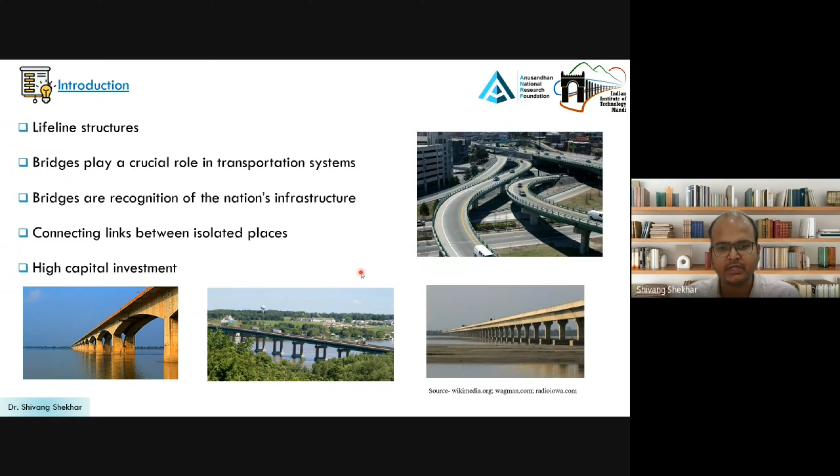Bridges are one of the most critical lifeline structures, serving as vital links in transportation networks. They connect communities, support economic activities, and require significant capital investment. Therefore, ensuring their safety and functionality is essential for uninterrupted transportation and societal resilience.

Throughout their service life, bridges are continuously exposed to environmental stressors such as corrosion, flooding, and scour, which progressively deteriorate critical components and reduce structural capacity. Moreover, many existing bridges were designed using antiquated design standards, making them more vulnerable to natural hazards, including earthquakes. Therefore, assessing their lifetime vulnerability is essential for ensuring long-term safety and resilience.

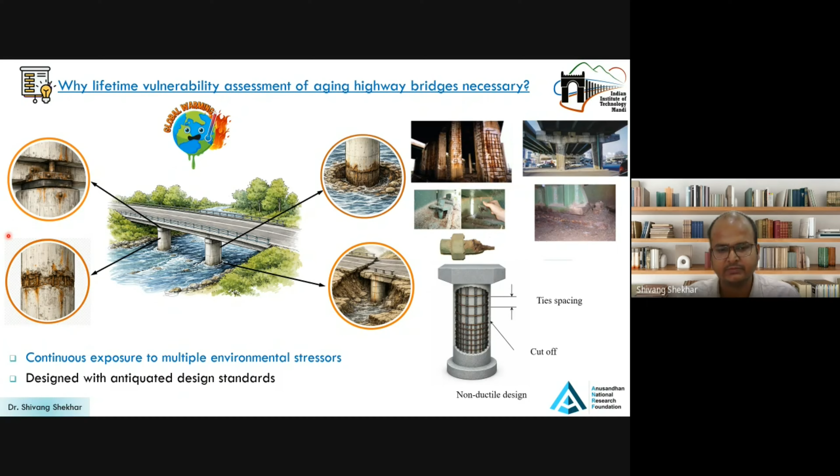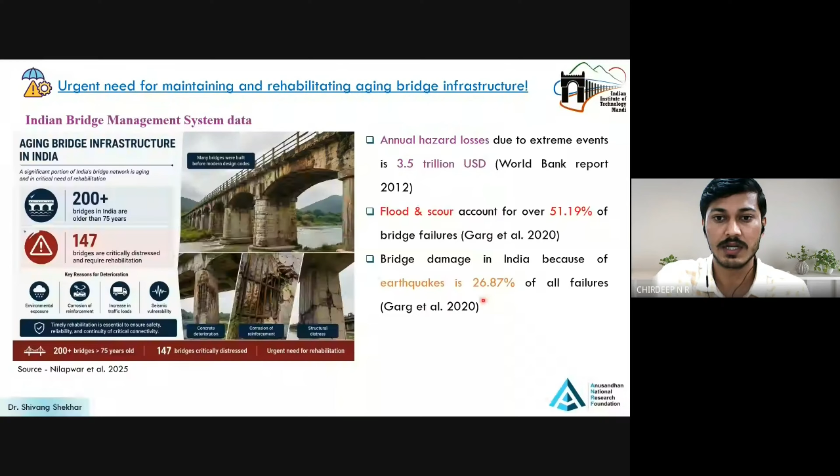The need for timely maintenance and rehabilitation is particularly critical in India. According to IBMS, more than 200 bridges are over 75 years old and 147 are already in critical distress condition. Furthermore, flood and scour account for over half of all bridge failures, while earthquakes contribute nearly 27%. These statistics clearly highlight the need for lifetime vulnerability assessment and effective rehabilitation strategies for aging bridge infrastructure.

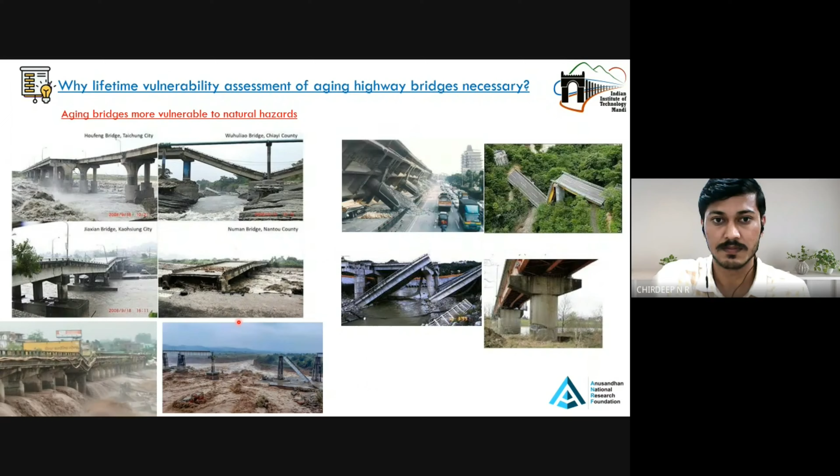In addition to aging and natural hazards, climate change introduces an additional long-term threat to bridge infrastructure. Rising global temperatures accelerate corrosion of RC components, while changes in rainfall patterns increase the frequency and severity of floods and storms. As a result, bridges are expected to deteriorate faster and become increasingly vulnerable throughout their service life.

To capture these future changes, climate projections are represented using the latest CMIP6 shared socioeconomic pathways, or SSP scenarios. These scenarios describe different greenhouse gas emission pathways and their corresponding temperature projections. In this study, these climate projections are incorporated to evaluate how future climate conditions influence bridge deterioration and lifetime vulnerability.

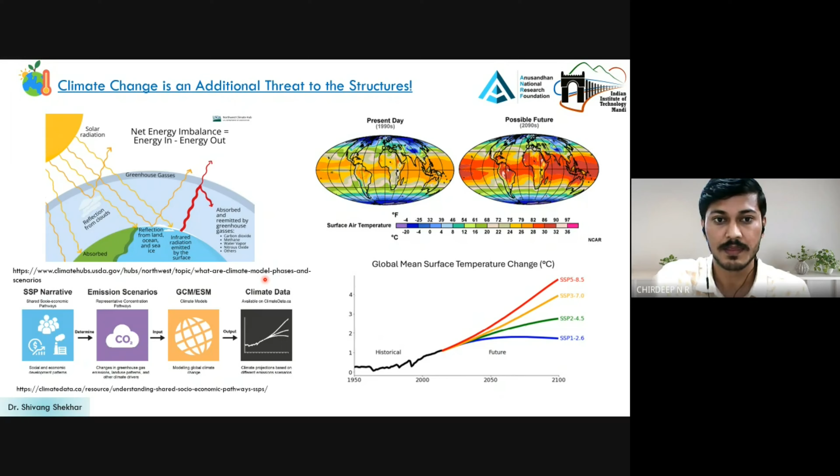Climate change accelerates chloride-induced corrosion in RC bridges by increasing temperature and environmental exposure. Corrosion causes rust formation, cracking, concrete spalling, and loss of reinforcement, which leads to reduction in strength and ductility. Consequently, when an earthquake occurs, these deteriorated bridges become much more susceptible to severe damage or even collapse.

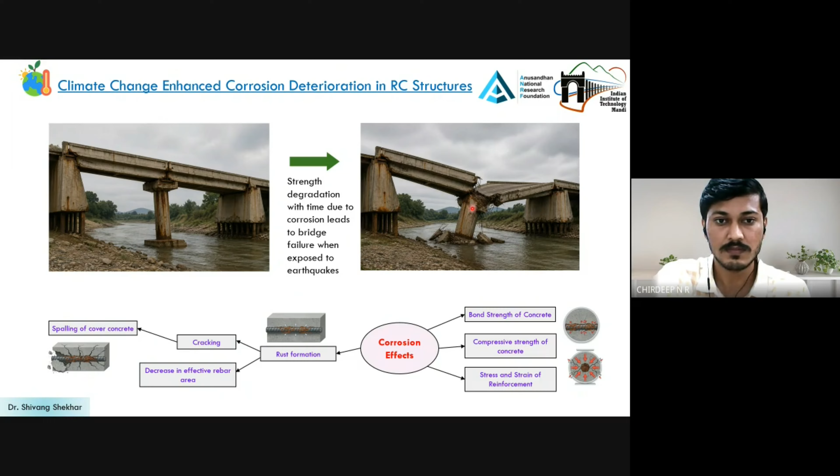To quantify the effect of climate change, temperature and relative humidity correction factors are incorporated into the corrosion initiation model. The results show that average corrosion initiation time reduces from 31 years under normal conditions to around 22 years after considering climate change effects, which indicates significantly accelerated deterioration.

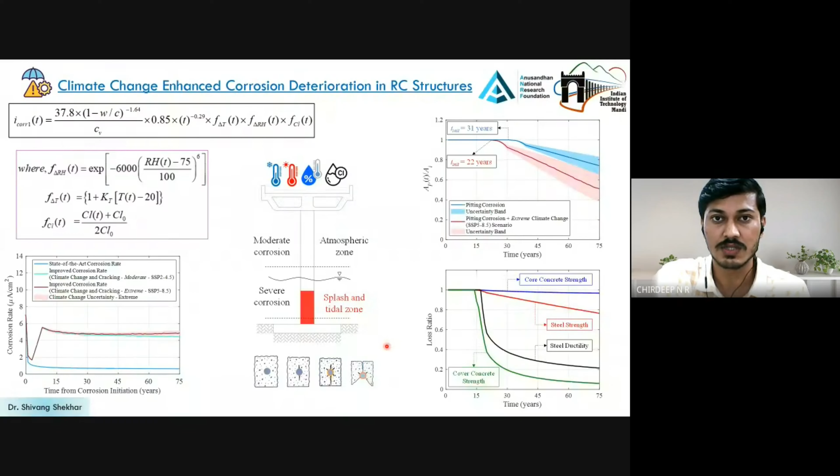After corrosion initiation, the corrosion rate increases progressively under climate change, leading to greater reinforcement area loss and continuous degradation of both steel and concrete properties. Consequently, the bridge experiences a substantial reduction in its load carrying capacity and seismic performance.

Climate change not only accelerates corrosion but alters the hydrological cycle by increasing extreme precipitation and flood intensity. These higher river discharges result in deeper foundation scour, reducing foundation stability and causing larger deformations. Consequently, riverine bridges become significantly more vulnerable to structural damage and failure during extreme events.

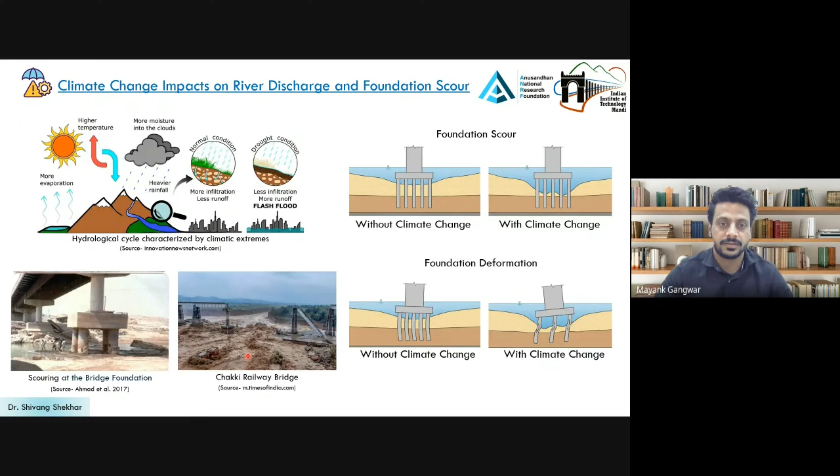Scour can be evaluated using two approaches: as a time-dependent process over the bridge service life, or under an extreme flood event. In this study, the time-dependent scour depth was estimated using historical discharge data, while the effect of climate change was incorporated through future discharge projections for the 100-year design flood. As shown in the figure, increasing river discharge under future climate scenarios results in significantly greater scour depths, making bridge foundations more vulnerable.

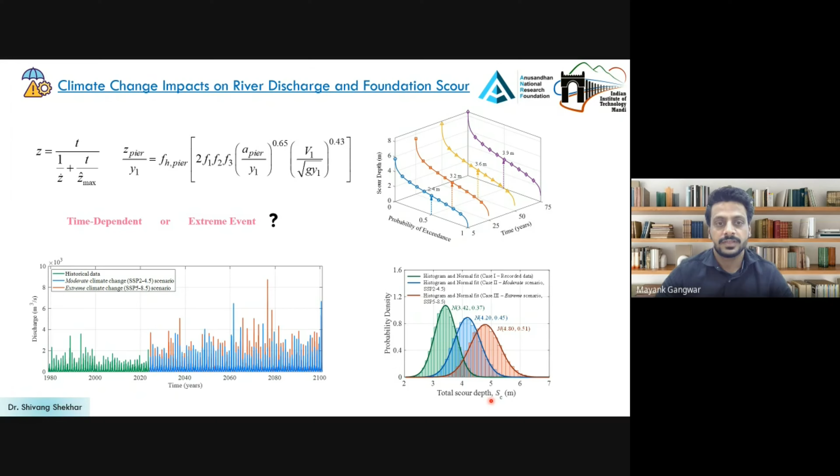Till now, we have seen how climate change accelerates corrosion deterioration and leads to deeper foundation scour. To evaluate the combined impact of these climate change-induced hazards on bridge performance, we have developed a high-fidelity finite element model of a typical highway bridge in OpenSees. The model incorporates detailed nonlinear behavior of bridge components, including bearings, abutment, foundation, and the effect of corrosion and scour.

Finally, the developed numerical model was validated against experimental studies, providing confidence in simulated structural responses.

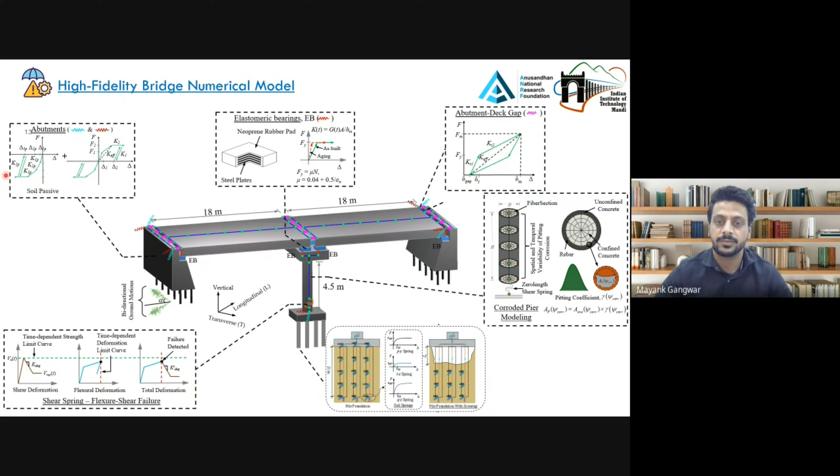After developing the numerical model, we investigated the effect of climate change accelerated corrosion on the service load reliability of an RC bridge in Gujarat, India. The result shows that corrosion alone reduces the bridge shear capacity by about 33% over its service life, whereas incorporating climate change increases the reduction to nearly 57%, indicating much faster deterioration.

A similar trend is observed in service load reliability. The bridge reaches an unfit for use condition after about 83 years under corrosion alone. But climate change further reduces the service life by approximately 18 years, highlighting its significant impact on bridge durability.

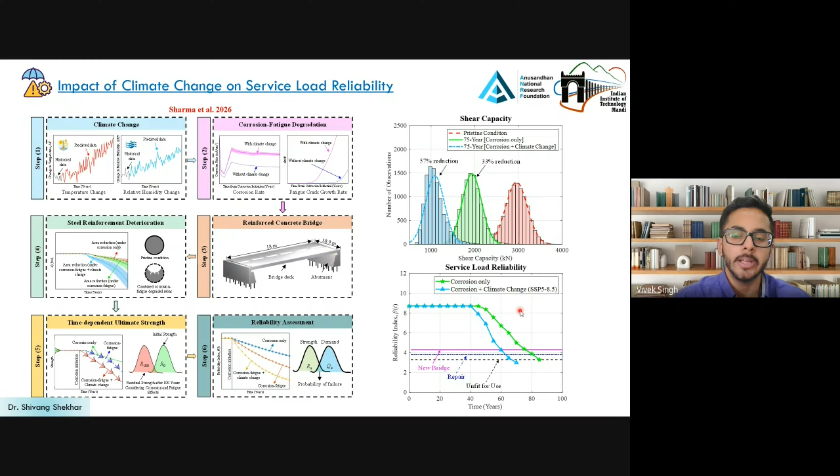Next, we investigated the combined effect of climate change, accelerated corrosion, and earthquakes on the seismic vulnerability of aging bridges with the help of seismic fragility curves. The result shows that compared to the as-built bridge, the 75-year corroded bridge exhibits higher seismic vulnerability, which further increases under future climate scenarios, with the highest probability of failure under the SSP5 8.5 scenario.

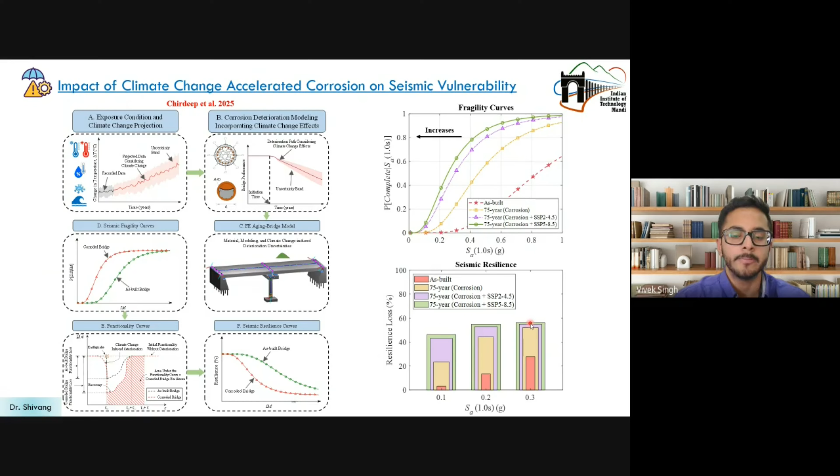Similarly, the climate change accelerated corroded bridge experienced greater functionality loss and lower resilience, indicating a significant decline in post-earthquake performance and recovery capacity. Next, we investigated the impact of climate change-induced scour on the seismic vulnerability of riverine bridges.

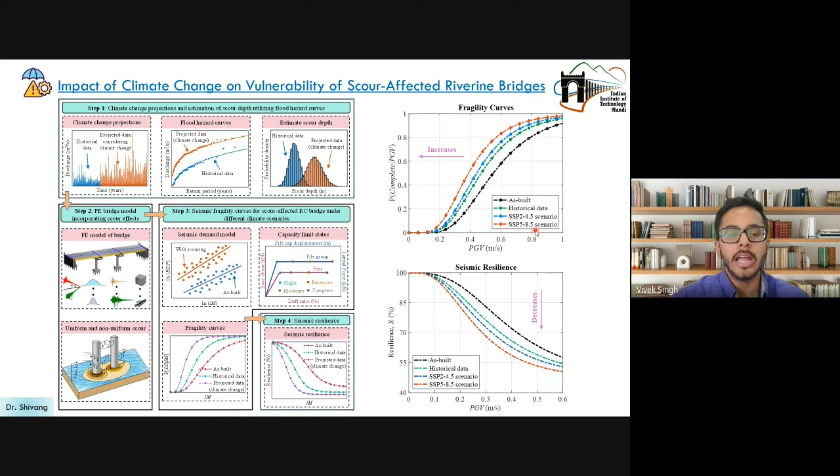The result shows that the seismic vulnerability increases significantly under future climate scenarios. Compared to the historical condition, the bridge exhibits a higher probability of failure under both SSP2 4.5 and SSP5 8.5, with the highest vulnerability under the SSP5 8.5 scenario. Likewise, the increased scour depth due to climate change significantly reduces the seismic resilience of the bridge.

Finally, we investigated the combined impact of climate change, accelerated corrosion, scour, and earthquake on the seismic vulnerability of bridge systems. Unlike previous studies that considered these hazards independently, this work developed time-dependent multi-hazard fragility and resilience curves by incorporating the coupled effect of corrosion and scour under the changing climate conditions.

The result shows that the bridge failure probability increases progressively over the service life as corrosion and scour intensify, resulting in greater post-earthquake functionality loss and a significant reduction in seismic resilience.

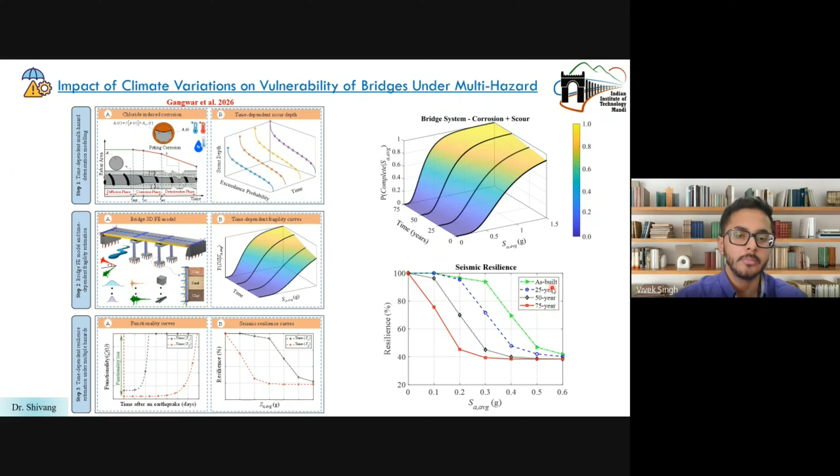So far, we have seen how climate change accelerates corrosion and scour, increasing the seismic vulnerability of aging bridges over time. However, vulnerability assessment alone is insufficient. Effective mitigation strategies are also needed. Seismic retrofitting is a practical and cost-effective solution, but its effectiveness depends on the retrofit configuration and intervention timing. Optimizing both is essential to maximize safety, extend service life, and improve sustainability.

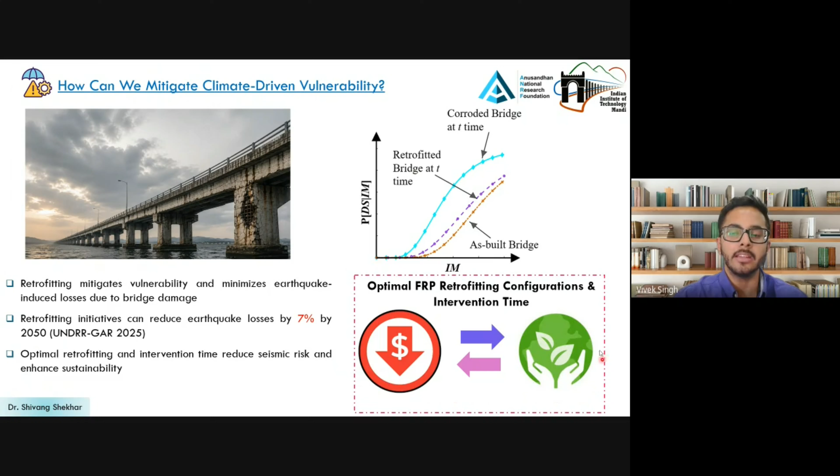Therefore, we next investigated suitable retrofit strategies to mitigate these adverse effects. First, we evaluated the effectiveness of FRP jacketing in improving service load reliability. The result shows that strengthening the bridge girder with FRP delays deterioration and extends its service life. FRP jacketing was then applied to the bridge pier, significantly enhancing lateral load capacity and reducing the seismic fragility.

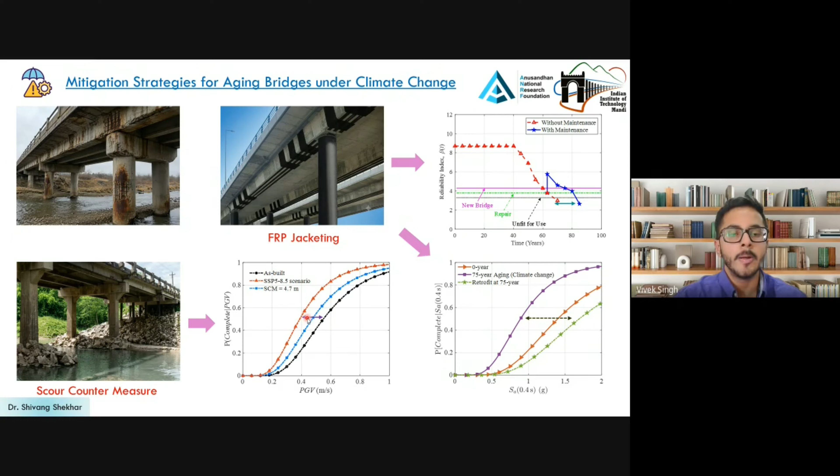Finally, riprap was adopted to mitigate climate change-induced scour, improving foundation stability and lateral load resistance while reducing the seismic vulnerability of the bridge. Finally, we evaluated the effectiveness of these retrofit strategies in terms of seismic risk and resilience.

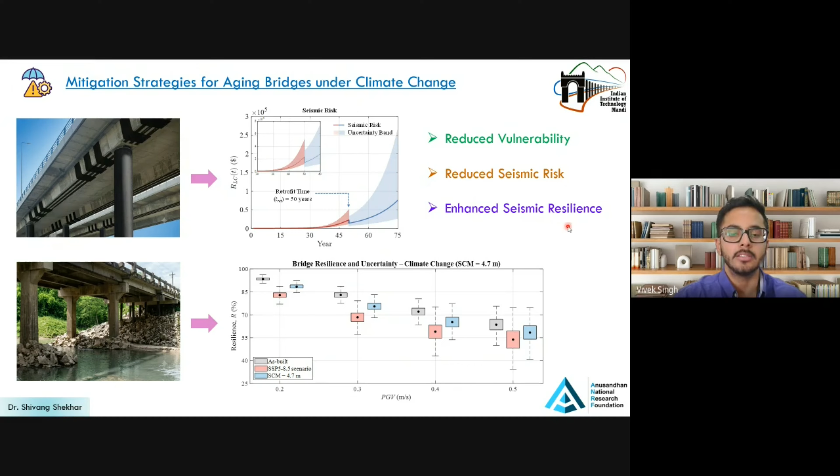The result shows that timely FRP retrofitting reduces the seismic risk by enhancing the structural capacity of the bridge, while riprap improves foundation stability and seismic resilience under climate change conditions. Overall, both strategies effectively mitigate the effects of climate change by reducing bridge vulnerability and risk while enhancing resilience. The outcomes of this research have been published in several reputed journals and international conferences in the field of structural and earthquake engineering.